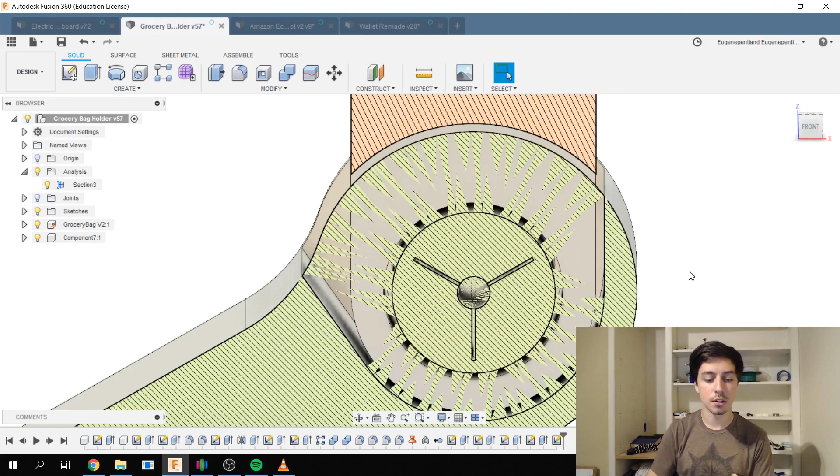So if you have a particular area that's going to be under a lot of load, or needs to be stronger than everything else, adding very small, thin slits will make it stronger in that one region without increasing the infill everywhere else.

Number 4, bridging. In 3D printing, bridging is when you're printing over an open area and you need to get a piece of material from one side to the next, without needing a support structure.

A good way to explain this is if you've ever used a tape measure. If you pull it out a very short distance, it's going to keep its shape - the structural integrity of the tape measure, being slightly curved, allows it to keep going and stay out straight.

But the farther the distance you make it go, the more likely it is that it's going to start to bend and collapse. It's kind of the same thing in 3D printing.

If you're printing over a very small gap, it's likely that it's still going to keep that line nice and straight. But if you're going from one solid position out into nothing, with nothing else to support it on the other side, it's going to start drooping.

So bridging is when you have a big open area. Say I'm trying to print a string going across from one side to the next - because there's a tower on one side and a tower on the other, it's able to make that line pretty much perfectly straight because there's somewhere to connect it to.

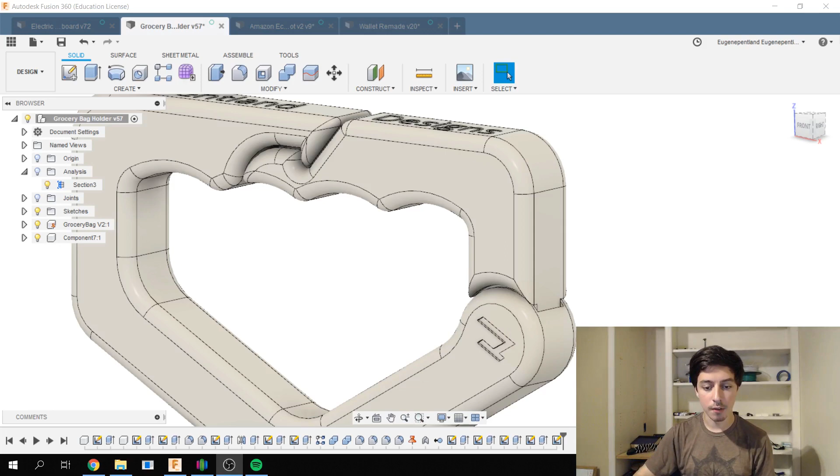One way I was able to take advantage of this was in the design of this model. Like I said, this prints entirely pre-assembled, so you can see the pin runs all the way through the middle here, and we're taking advantage of bridging to be able to get this to work.

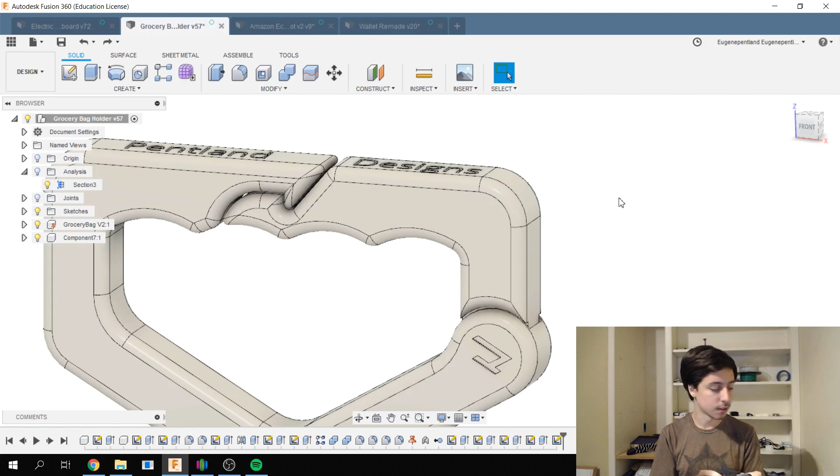After this finishes printing, all you have to do is take your 3D model, snap this arm out of place, and then it's good to go. You don't have to do anything else. You can see in this model there's actually a tiny little gap in between these two sections.

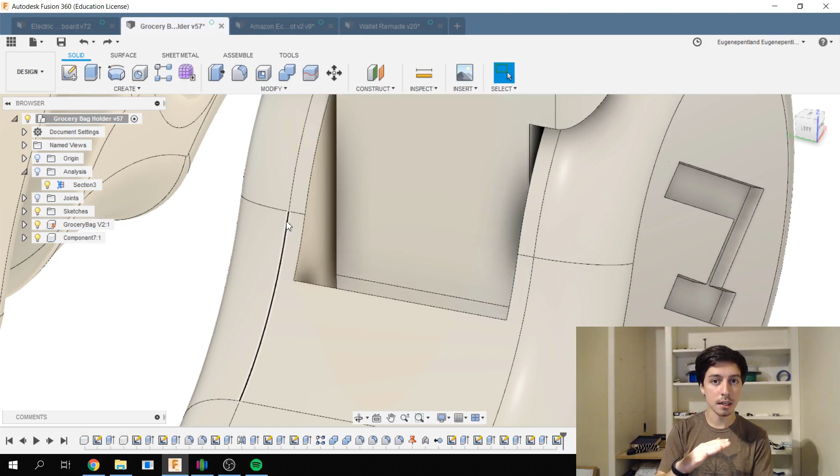So in between the hinge and the wall, there's a 0.375 millimeter gap. This allows enough space that the material is not going to stick to the previous layer, but it's still close enough that if there were any drooping, it wouldn't droop enough to actually adhere to itself.

A better way to explain and visualize this is in the slicing. This is the very last layer before that top layer starts. If I go to the next layer, you can see it built this entire yellow region.

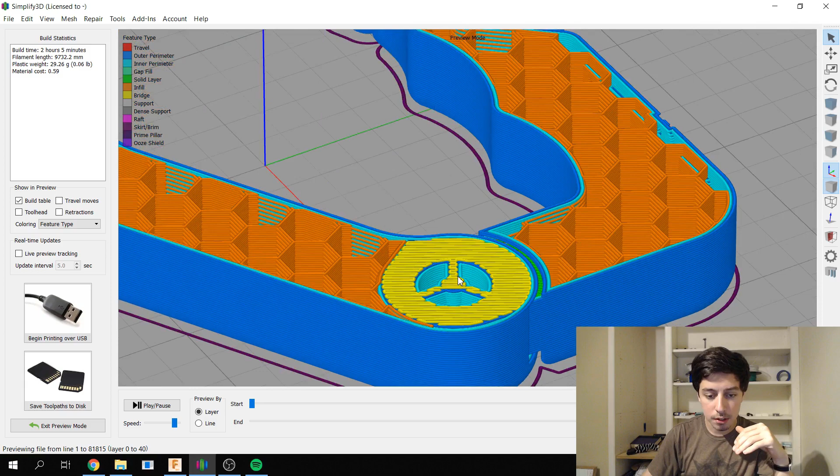In this yellow region, pretty much this whole half of this section has material for it to go to. So from this point to this point, it could just make a single string, and it has somewhere to attach, so it'll be nice and straight throughout the majority of the pin.

The rest of it up in this section is really where it may be drooping a little bit more, and why you actually have to kind of snap it into place to get it to go there.

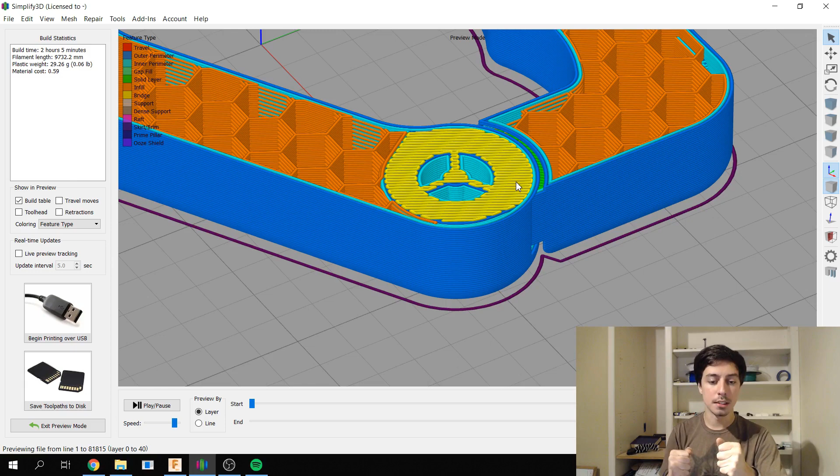Number 3, thin walls. Whenever you're printing a wall between, say, 0.8 to 2 millimeters in thickness, you want the wall thickness to be a multiple of the nozzle diameter. Typically on most 3D printers, it comes standard with a 0.4 millimeter nozzle. So if you're printing thin walls, you want it to be either a 0.4, 0.8, 1.2, 1.6, or 2 millimeter thick wall.

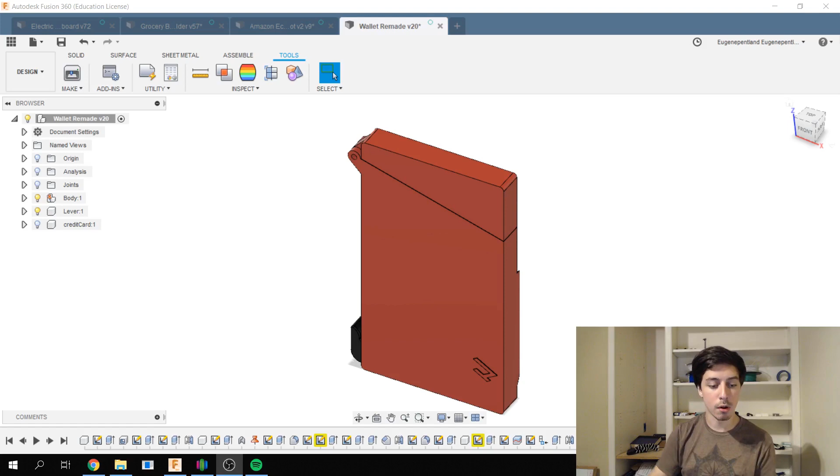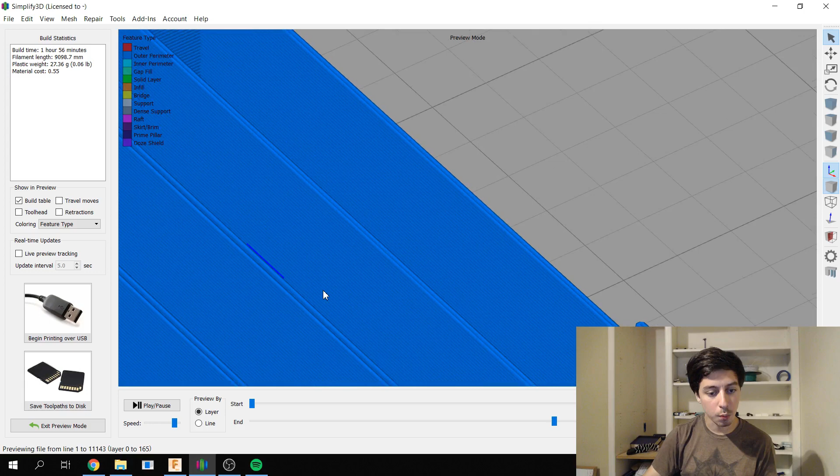The reason for this is that since it's a 0.4 millimeter nozzle standard, it can't make any section smaller than that. A good way to visualize this is in Simplify3D. In the back here, I have a model with 0.8 millimeter thickness walls, and in the front, 1 millimeter thickness walls. When I slice this and look at the layers, you'll see that on the front section with 1 millimeter thickness walls, the lines are not actually touching each other.

Essentially it was told to make a 1 millimeter thick wall with a 0.4 millimeter thick nozzle, so it's making one wall on the left, one wall on the right, and there's a 0.2 millimeter gap in the inside. There's really no way for the 3D printer to compensate for that, due to the physical limitations of the nozzle diameter.

A way to get around this is by having the wall thickness be a multiple of the nozzle diameter. So if I make the wall thickness 0.8 millimeters, it's going to have those two walls right next to each other. It'll adhere properly, and it'll be a much stronger part in the end.

This is only something to think about when making very thin walls, like 0.8 to 2 millimeter thickness walls. This is because after it normally does two perimeters, say 1.6 millimeter thickness walls, it's just filling the middle in with infill, and at that point it doesn't matter anymore.

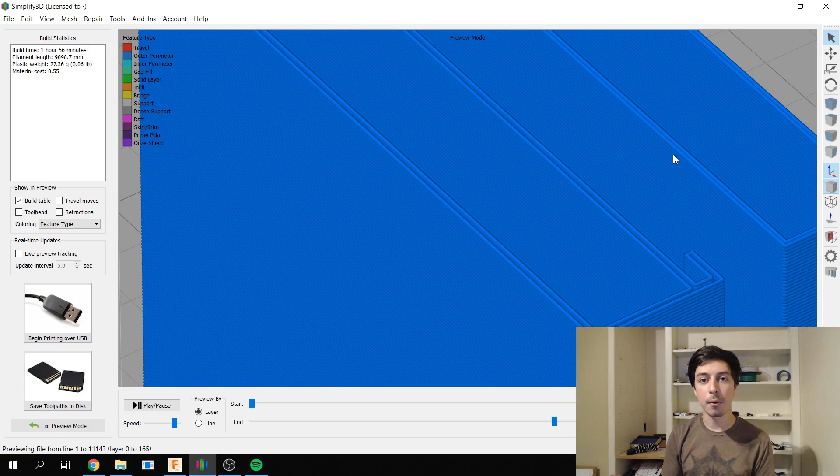Number 2, overhangs. Overhangs in 3D printing are where you're printing something and there's no material underneath it to support it, so it's kind of the opposite situation of bridging. There's one section that you're building off of, and then there's nothing out to the side of it that it can actually build on top of.

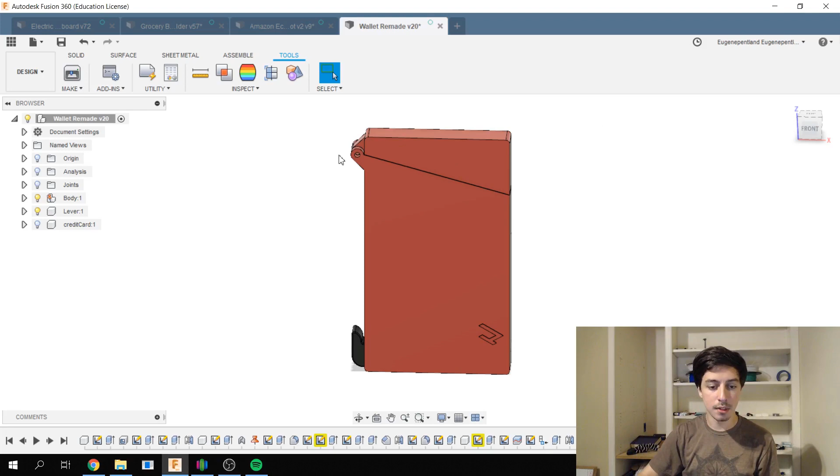An example of this is this pin that I have right here. If I didn't have this 45-degree angle here, there would need to be a support structure building up this entire section just to make this tiny little pin, because there's no material underneath it. Otherwise, the material starts sagging and wouldn't come out properly.

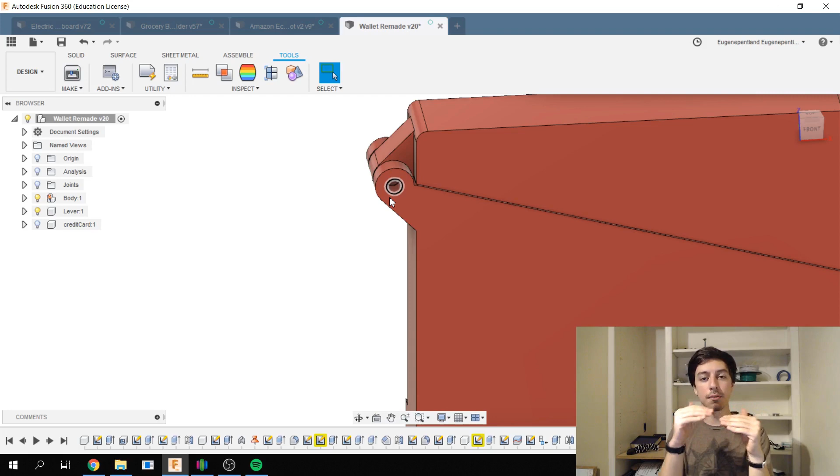So whenever you're designing something and there's no material underneath it, since 3D printing is building layer on top of layer on top of layer, if you go too far out to the side, there's nothing underneath it to support it, so it's not going to come out properly.

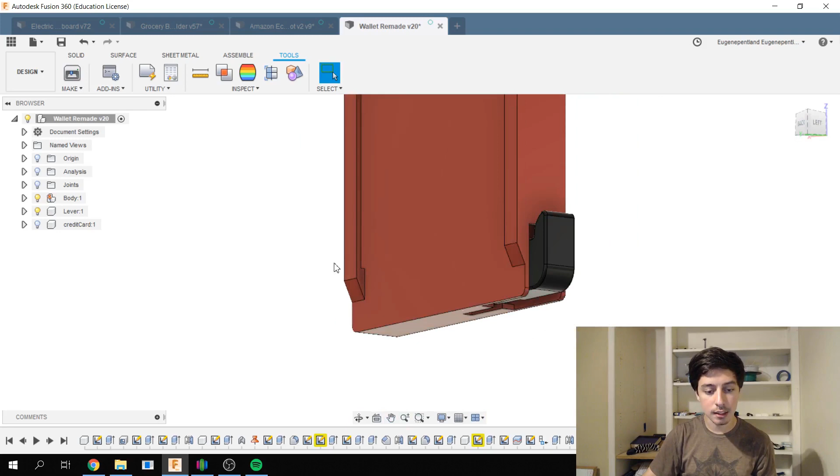Whenever you're building up, you want to make sure that if you have an unsupported region, you have at least a 45-degree angle underneath it to support that region. You can see that occurs in that pin, as well as in these back sections that hold an extra card inside the back of the wallet. It has these tiny 45-degree angles that aren't really noticeable in the design, but in terms of 3D printing, it makes it a lot easier.

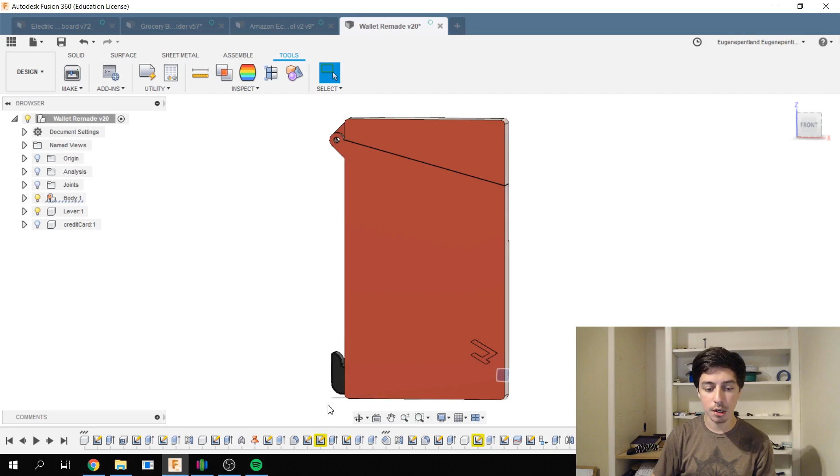You could use supports for this, but if I were to have supports along this whole line, it would actually make it more likely to fail while printing, because it had to build a small separate support structure that isn't attached to the base, doesn't have a very large surface area attached to the build plate, and could very likely break while building up to support that pivot.

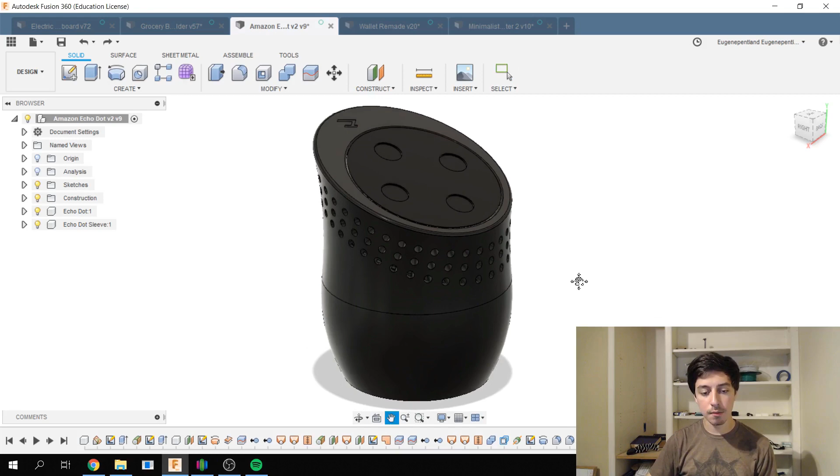Print orientation. When designing something specifically for 3D printing, print orientation is something you should take into account even before you start designing the item. So here I have a model of an Amazon Echo Dot holder that I've designed.

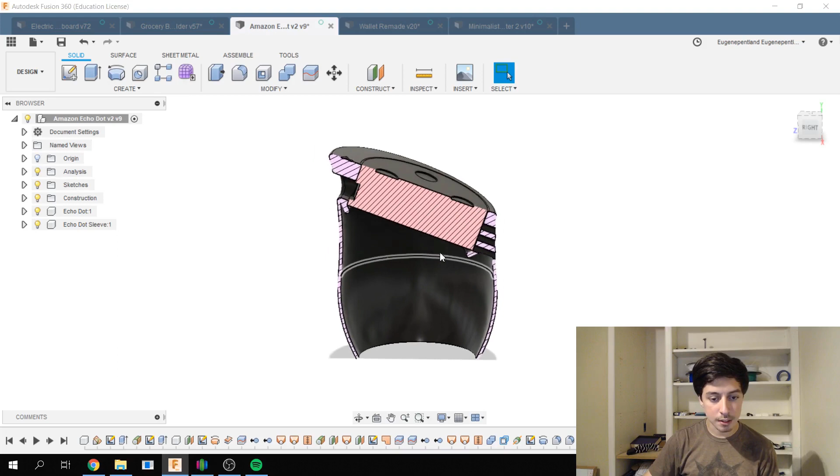Have a quick look and think about what orientation you think this should be 3D printed in. When I made this, the way I actually have it being 3D printed is on its face. The reason for this is that if I go to the section analysis, you can see I used the least amount of material possible while making this thing. There's only a small 45-degree angle actually holding this Echo Dot holder in place, and the rest of the body is entirely hollow.

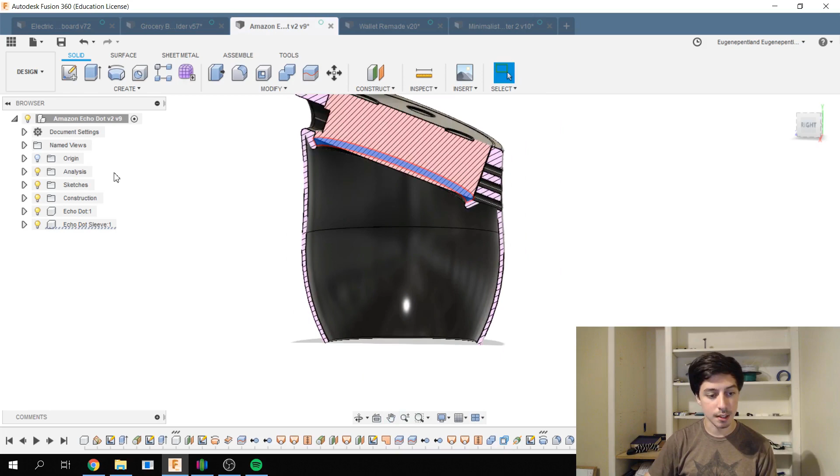I could have made this so you could print the item standing up, but there would have been a few disadvantages to that. If I printed it standing up as is, I would have needed material going along this whole curve at a 45-degree angle, and then material going along here at a 45-degree angle too, which would have increased the amount of material required to make this.

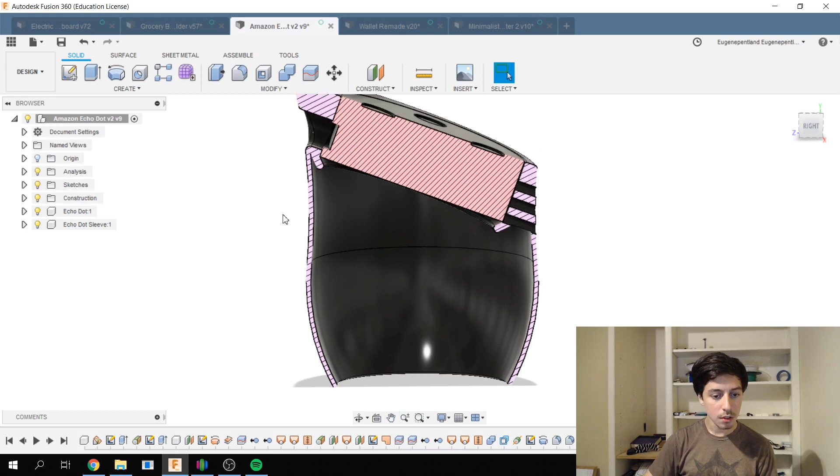On top of that, the adhesion wouldn't be as good to the build plate. So there's a kind of balance you have to find in making sure everything can adhere to the build plate properly. If I was printing standing up, there would only be this small region attached to the build plate, which may or may not get disconnected over a long print.

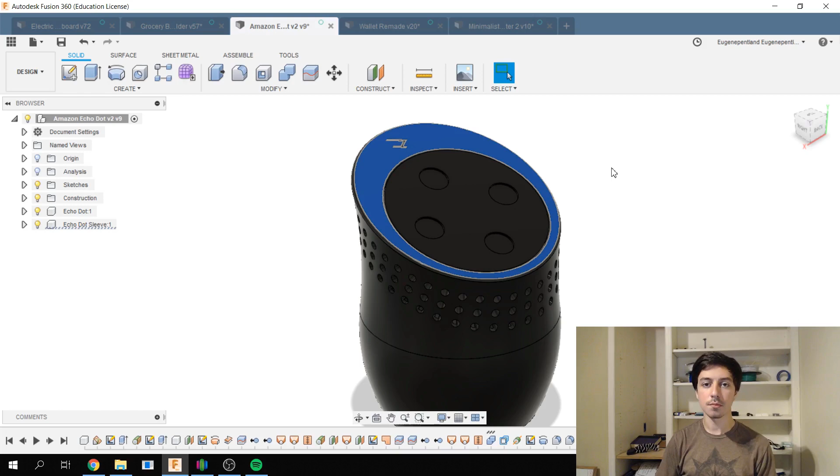But if I print it on this face, not only does that increase the appearance of that top surface, since it's against the build plate and comes out nice and clean, it also increases the surface area attached to the build plate, making sure it adheres properly throughout the entire print so you never have to worry about it. Whenever you're designing for 3D printing, you always want to think about the print orientation and what makes the most sense for the design.

I'm not going to go too in-depth about the structural integrity of different types of parts. There's a whole bunch of videos you could find about this. If you look in the video description, there are videos from people like CNC Kitchen that go into material testing and layer adhesion, that kind of stuff. That would be a good resource for that.